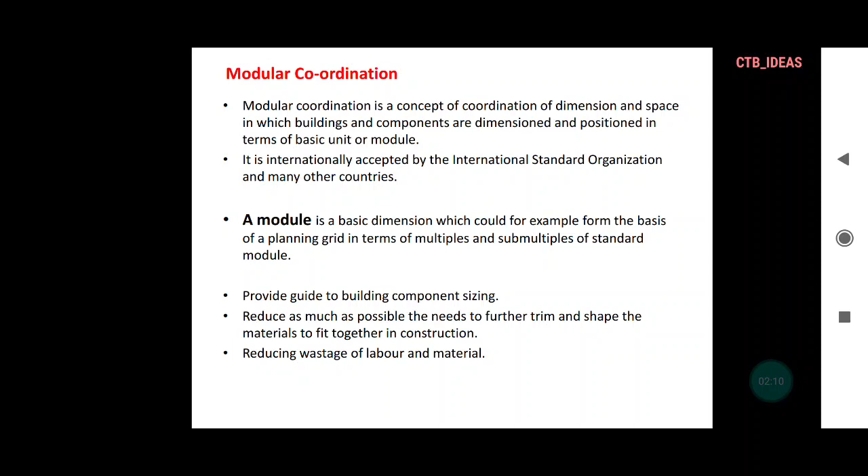So the aims of modular coordination: to achieve dimensional compatibility between building dimensions, making the planning simpler and clearer by a distinct indication of the location of the building components in the building, both in respect to each other and to a modular grid.

Then simplification of site work, limiting the number of sizes of the building components so that the linkage is based on modular measurement, reducing the need to manufacture special size components, then facilitating cooperation between designers, manufacturers, suppliers and builders,

providing practical and logical construction methods for the coordination of the position and dimension of elements, components and spaces in building design, which will contribute to increased design freedom and interchangeability of components.

Then the logistics, to improve the balance between quality and cost of manufacturing the component, and then creating a basis for rationalization of both general and special building drawings for modular building components and assembling details. So these all are the aims of modular coordination that are supposed to be achieved.

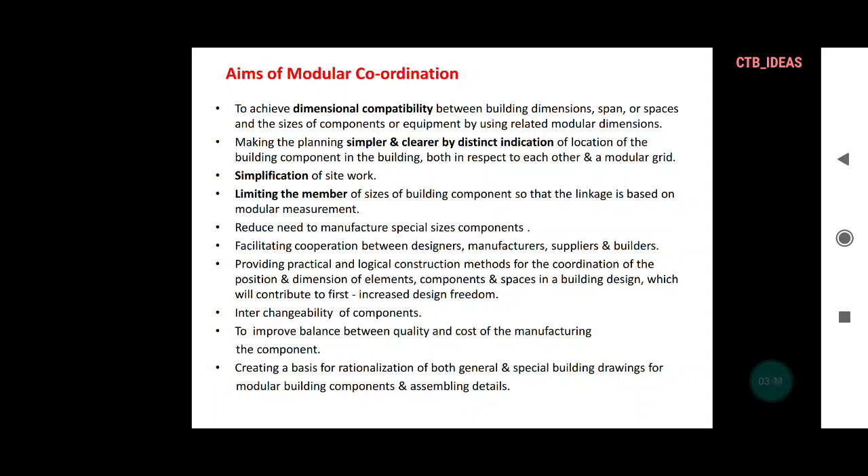Then the basics of module. What is a basic module? The basic module is known as 1M, which is equivalent to 100 mm. 1M is equal to 100 mm. So there are three types of module: basic module, multi-module and sub-module.

So the basic module is the fundamental unit of size in modular coordination, and for general application to buildings and components, the size of the basic module is taken as 100 mm and it is denoted by M. So whenever you see modular coordination drawings, you will often see M written as the basic module. It is considered to be large enough to effect some variety reduction in the range of component sizes and small enough to provide a flexible unit of measurement for the purpose of design.

Then multi-module. Multi-module is nothing but the multiples of the basic module. Certain whole multiples of the basic module, usually expressed as M with a numeric prefix as 2M, 3M, 4M, etc. That is referred to as a multi-module.

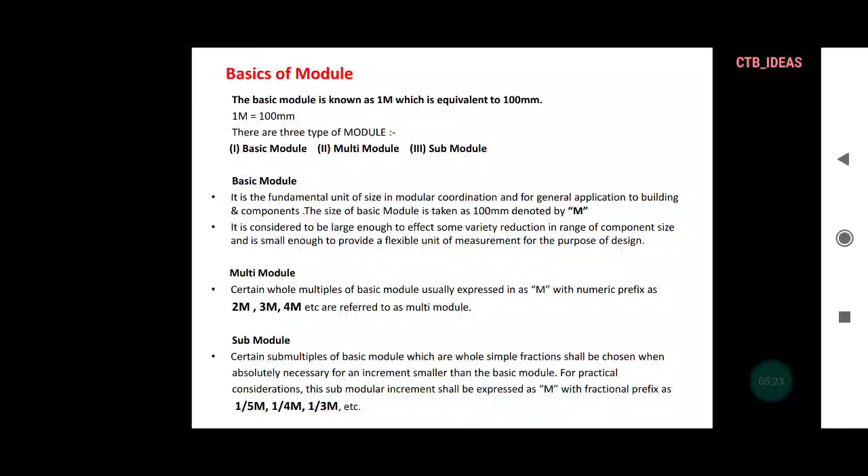Then you have the submodule. Certain submultiples of the basic module, which are whole simple fractions, shall be chosen when absolutely necessary for increments smaller than the basic module for practical considerations. This submodular increment shall be expressed as M with a fractional prefix: 1/5 M, 1/4 M, 1/3 M, something like that.

Then you have the basics of the modular reference system. The term modular reference system is the three-dimensional system of orthogonal space coordinates within which the positions and sizes of components, elements and installations can be related by reference to points, lines or planes.

So I was talking about the figure at the top right corner. You can see various orthogonal projections. Basically it is a modular space grid, a space grid in which the distance between consecutive parallel lines is the basic module or a multi-module. It is also further subdivided into various components like modular line, modular plane, modular zone, modular size, etc. Okay.

So basically it is divided into various modular lines, modular zones and controlling planes, you can say lines, zones and planes. So this thing you have to keep in mind. The figure in the bottom left you are seeing is the basic modular grid. So what is a modular grid actually?

Basically the modular grid is divided into 3 types: basic modular grid, multi-modular grid and tartan grid. So the image at the extreme right you are seeing is the tartan grid. Basic modular grid is on the extreme left. Then you have the multi-modular grid, that is again subdivided into square grid and rectangular grid. So it is similar to the basic modular grid.

The multi-modular grid is formed with the intervals being multi-modules. They can either be squares with same intervals in both directions or rectangles. So these grids are based on the recommended multi-modules. They are used in key plans showing the layouts of buildings, complexes, and position of main building components, and these drawings usually have scales of 1:50 and above.

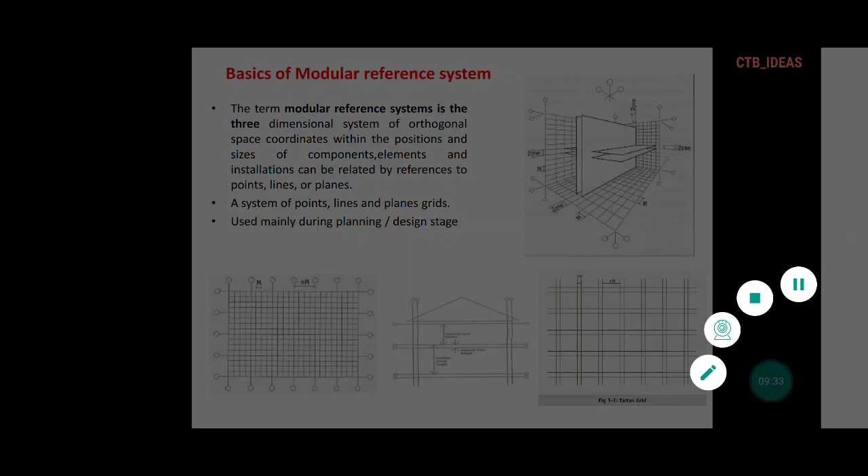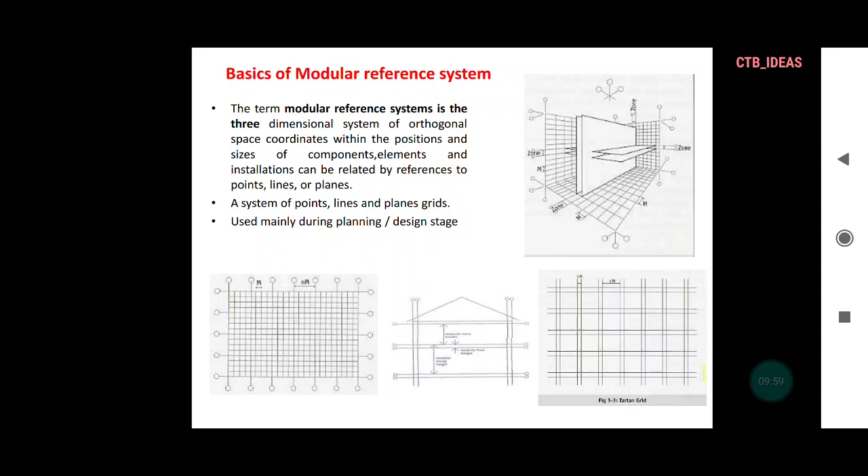Then the tartan grid. Tartan grid is an interrupted modular planning grid, in which the intervals or bands of interruptions are regularly spaced in both directions and are of different modular order to the general modular planning grid, as shown in the figure on the extreme right bottom. This pattern may be used in very regular plans like those with columns at constant intervals throughout the floor.

So the typical modular coordinated planning grid looks something like this, where M is equal to the standard module. So the very smallest square you can see is the basic module on this modular grid. Then you can see the structural grid, which is used to locate the structural components such as beams and columns. You can see the structural grid shown as 45M.

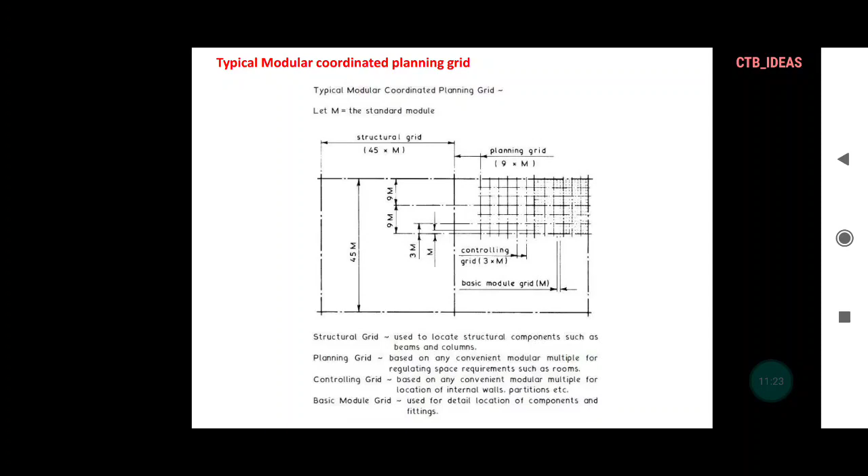Then you can see the planning grid, which is based on any convenient modular multiple for regulating space requirements such as rooms, 9M as shown in the figure above. Then you can see the controlling grid, based on any convenient modular multiples, for locations of internal walls, partitions, etc. And then you have the basic modular grid used for detailed location of components and fittings. When you study it for the very first time, it is a little bit complex to understand, but slowly you will get familiar with this type of drawings.

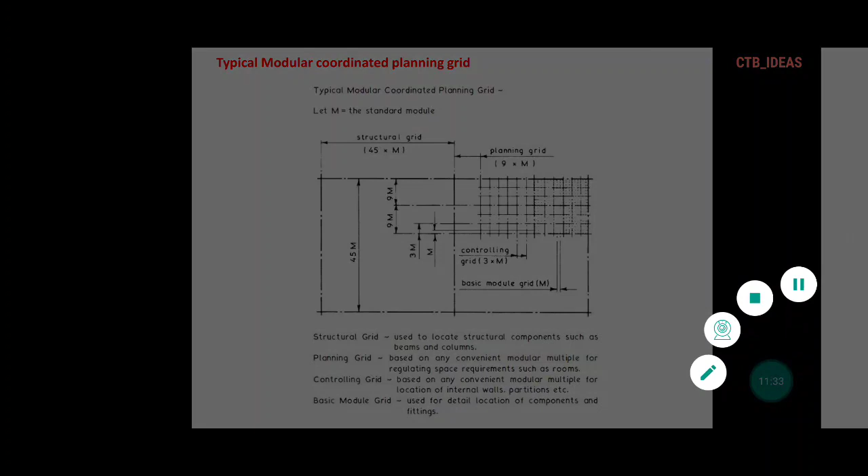So for the typical modular coordinated planning grid, you have two main types, face grid and axial grid. So face planning and axial planning. In face planning, it is used to position components and elements of construction in relation to the grid. It determines both the positions and sizes of components and elements of construction. It also shows the relationship between different components.

So it is represented by pairs of parallel lines, and the components or elements are placed with the faces on the lines. So the distance between the sets of parallel lines is always modular in face planning, which you can see in the figure bottom left. Now regarding the figure on bottom right, it is the axial grid or axial planning. Axial planning normally determines positions of major components, for example columns, cross walls, etc.

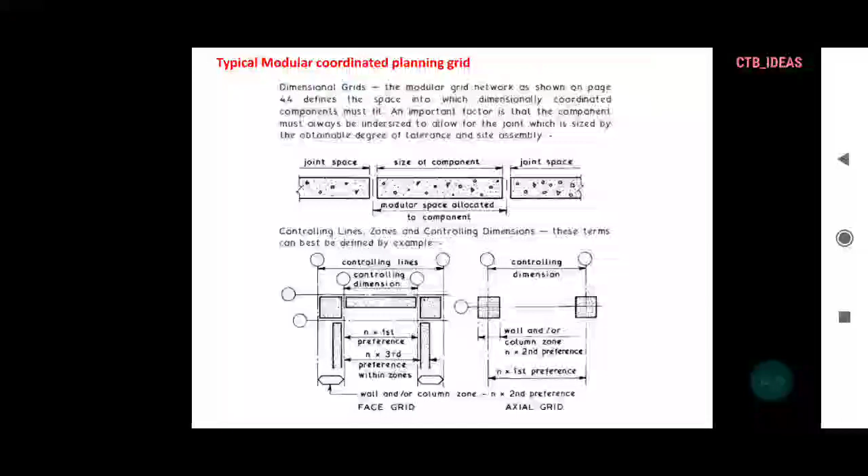So the grid lines in this plan will run along the center lines of the components, similar to the way you draw in the working drawing, and the distance between the grid lines is always modular. So note the difference. In axial planning, the distance between the grid lines is always modular, and in face planning, the distance between the sets of parallel lines is always modular.

Now these are several notations and standard symbols we use while working on modular coordination. So the very first representation is for modular line. You can see the circle and a line or a dotted line. Then you have modular space, that is the distance between two modular lines. Then you can see modular line planning, then modular reference line and distance written in between them, location of reference

line, then dimension lines. You can see reference plane, checking dimensions, modular dimensions, non-modular dimensions, manufacturing dimensions, neutral zones for non-modular, etc. So as you draw these modular coordination drawings, you will get familiar with these symbols. At first it is really difficult to catch up or understand them.

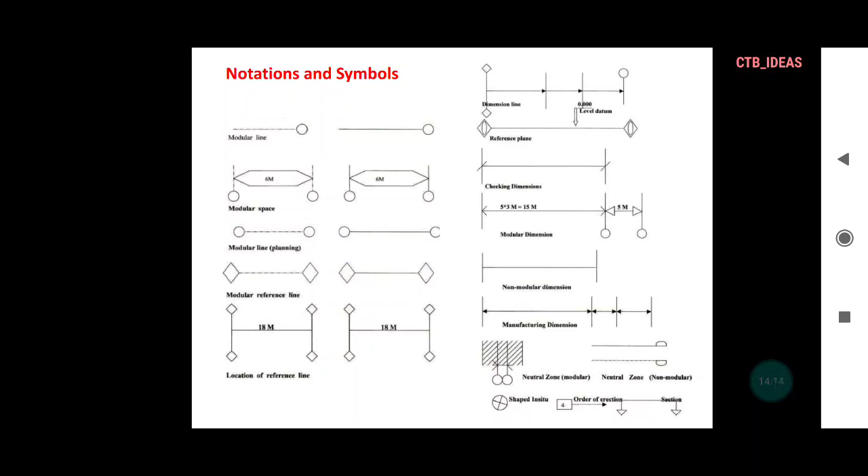Now the horizontal and vertical coordination. The top left figure I have already explained in the horizontal planning. The bottom right figure I will be explaining here. It is regarding vertical coordination. The main vertical controlling dimensions are taken from coordinating planes in the reference system, that is storey height, floor to floor height, floor to ceiling height, floor zone and roof zone.

The intermediate controlling dimensions are door head height, window head height, window sill height. So you can get the idea of these types of dimensions in the vertical coordination. The modular floor plane from which the vertical coordinating dimensions are taken is a continuous horizontal plane over the whole of each storey of a building. This means that there is only one floor plane for each level. So this is really difficult to understand.